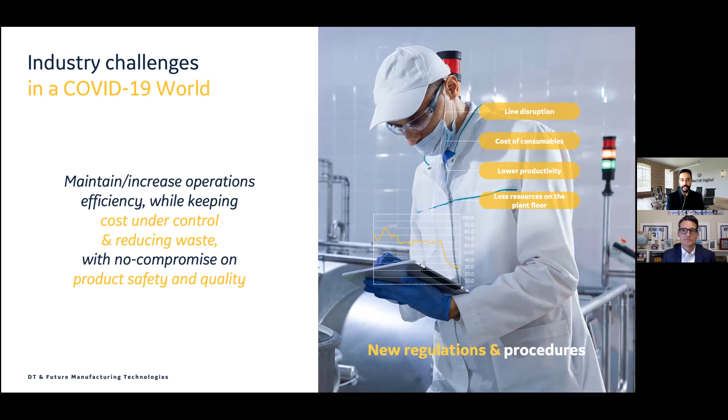To help with things like cost, waste, safety, and quality, a key part of that journey is really leveraging automation software. If you think automation software, that is where data comes from. If you look at something like HMI SCADA, the name itself is supervisory control and data acquisition. It's really critical to get that data to be able to start the digital transformation, to stay competitive and meet the needs of your customers.

What we're really seeing now, with these new needs to do things better and all the challenges of having to be more agile and adaptable, is a blurring of where that data sits. This pathway is changing, where more and more there's a need for what I like to call a data bus or data hub, where all the data from these different systems is accessible in one place with context across them. This is causing a shift in the way you think of these systems, all driving to this central data hub and information used for optimization.

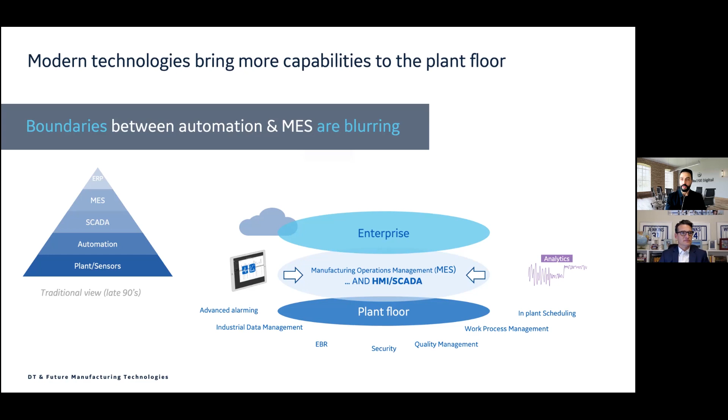Once you have that, data isn't very good unless you can visualize it. Once there's the idea of a data hub, having all the information, it's really critical how you actually get your workers to see and use that information in the most effective way. To try to articulate that, I just want to quickly show this visual here.

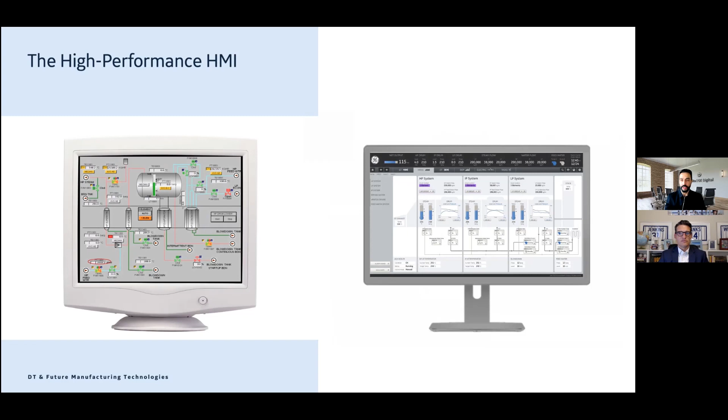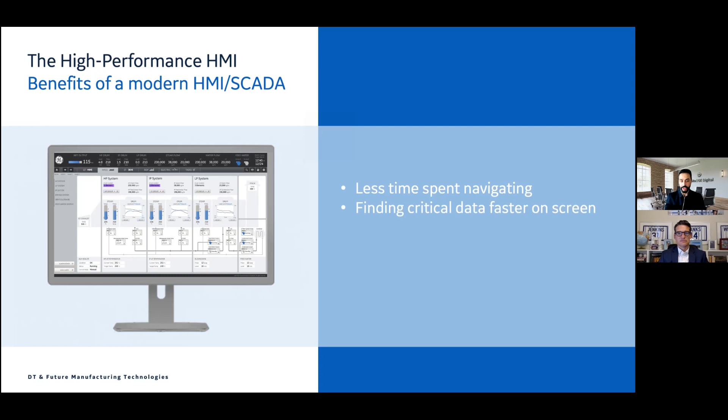So why do that? The key thing here is really about helping users spend less time trying to navigate through the systems to do their jobs most effectively. It's being able to find critical information needed, especially during an abnormal situation, as effectively as possible. With alarms happening, you want to move as quickly as possible from identifying a situation to finding the relevant information to act upon it and fix the situation.

So we've really seen that by having high performance HMIs that make interfaces a lot more accessible and digestible for users, they can be way more efficient.

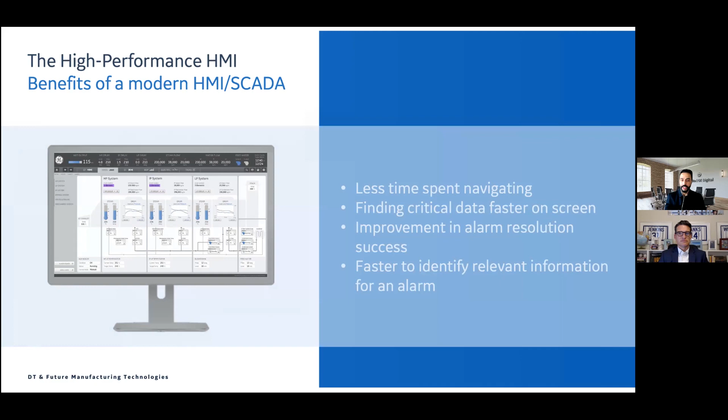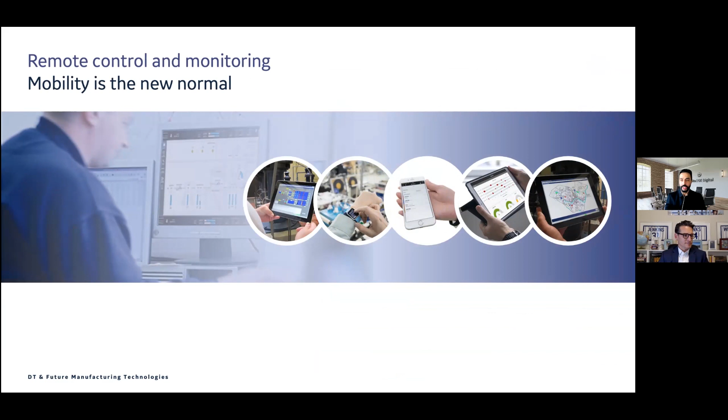And to take that one step further, you go from accessibility and having the right screen to where do you make that screen available to users. Traditionally, it would be like a panel connected to a piece of equipment. But more and more, especially with COVID, it's important now that information is accessible no matter where you are. It's really, really critical.

One piece of that is having information accessible anywhere, anytime, on any device, having that great experience we just discussed, but also making it customizable for that specific user. Depending on role, depending even on accessibility, you want to cater the interface for the task at hand for that specific user. I think that's really a change and a shift.

But the other piece of that, which I mentioned at the beginning, is also being outside of the plant. More and more, we saw with COVID, is the need, for example, even if it's a water treatment plant or a manufacturing plant, to have operators and subject matter experts doing support outside the plant to be most effective.

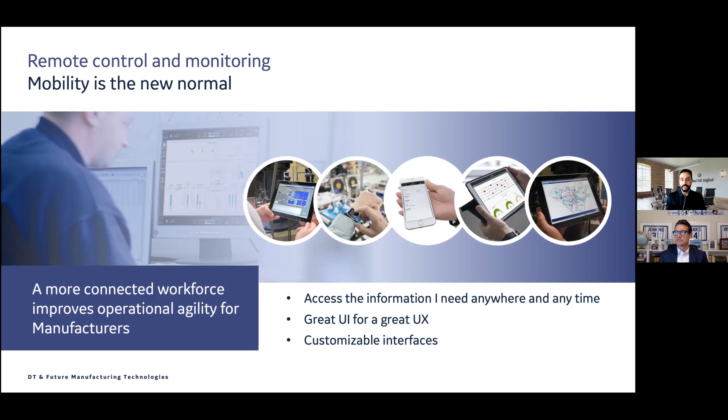And when you look at that in the context of the bigger picture of why, it's about things like: how do you actually use your staff most efficiently? How do you increase that response time to any situation?

It could be an abnormal situation, but also, as I mentioned earlier, it could be supply and demand. Maybe there's a shift in what you want to produce or what you need, like increasing water usage, or because there's a shift in the products that customers want. So you want that response time to be faster to make those changes within your environment.

And lastly, while doing all this and having to be more agile in production, you also want to continue to be compliant to industry and government regulations. We've really partnered with several customers on this journey, especially at the start of COVID, and here are some of the results we've seen.

One thing they mentioned was the speed of troubleshooting - they were able to reduce the time it took by 40%. Again, they were able to react faster. They had better visibility into what was happening at one plant and across the entire enterprise, and were able to be more agile to make adjustments or changes. And lastly, but also as important, they were able to increase safety.

A simple example of that is, I talked to a customer who discussed how they would have a shift change meeting with multiple people, usually all close together huddled in one place. But they started using technologies like phones, and had people further apart while still being able to use their mobile devices to see each other and effectively have those types of meetings.

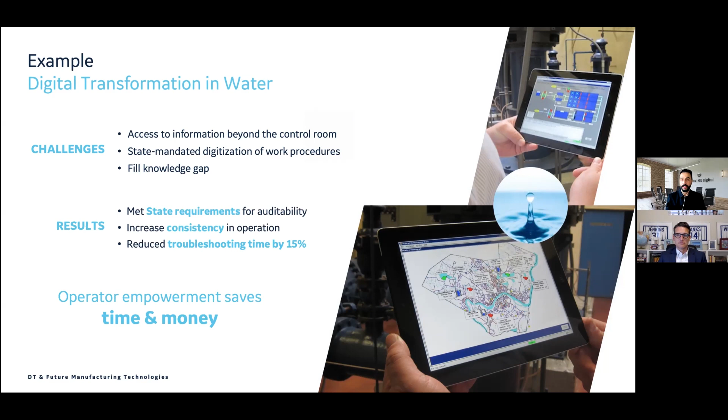So what they really did was use these technologies to create the best interfaces, and standard operating procedures within the software, so they could ensure consistency in operations. They ensured that new or remote users could still troubleshoot, still support people within the plant, and still meet the actual compliance and auditing regulations they need to fulfill.

And in the end, this comes down again to safety, time, and money.

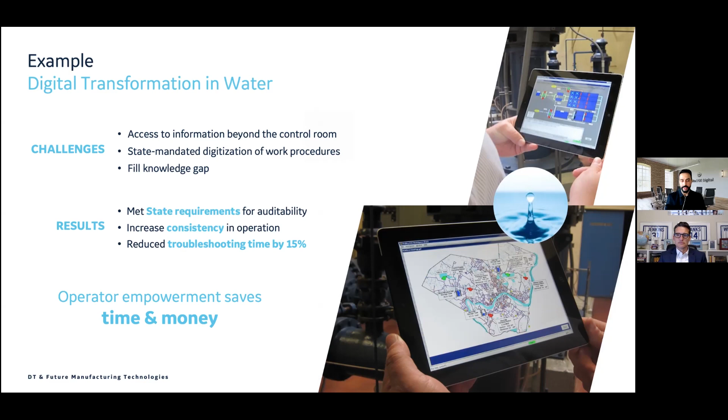So that's the story regarding visualizing data. But what comes after? You have to aggregate data, you want to have context in the data, you want to visualize it. But the next part of that journey is really: how do you optimize through data? And this is really where analytics come into play.

If you look traditionally, when we talk about analytics, the expectation is that there is a data scientist, and a data scientist needs to have domain expertise, mathematical expertise, as well as software development expertise. And that really is hard to find, and that's really challenging.

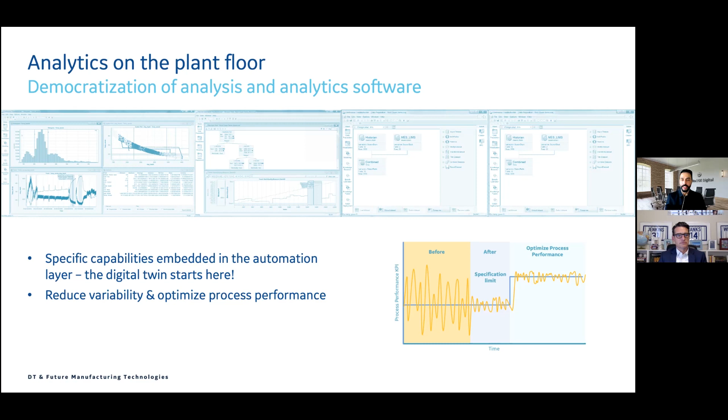So what we're seeing now with new technologies is enabling more of a focus on domain expertise—having control engineers and process engineers who have domain expertise, being able to use software to bridge the gap between the mathematical expertise as well as the software development expertise.

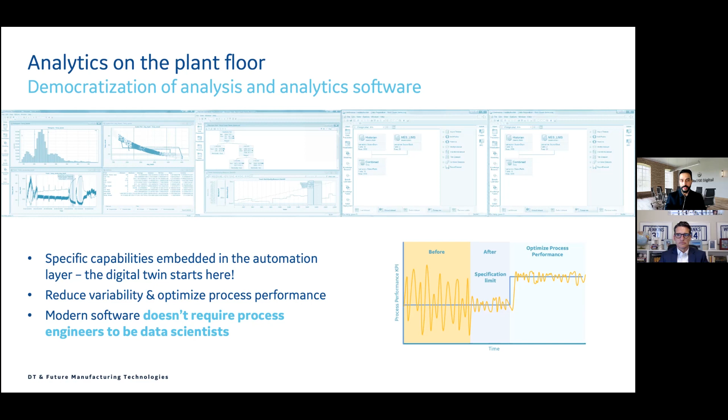A key part of this comes down to automation software. If you can do that, you can start making things better when it comes to the actual monitoring and control of your equipment and processes. As you can see in this picture on the right-hand side, it's all about going from having variation in your process, which can cause quality and performance issues, to making it as optimized and consistent as possible across continued production of whatever you're creating.

So what are some of the benefits of these analytics? Let's go through those. Some of them are things like reduced variability. You want to go from a process with a lot of variability across equipment and process to consistency.

Having speed of troubleshooting, being able to use analytics and visualization to analyze what's going on and resolve it quickly. Having the ability to leverage your staff most efficiently across the entire plant and enterprise, and being able to decrease downtime.

What this really comes down to is, if you think about all the optimizations you're doing with things like a PID loop within a controller, or what you're able to do with SCADA, you can now think about how to actually optimize that to make it most efficient and therefore reduce the amount of time equipment will be down due to failure.

The other piece of this is optimization. If you think of all these things I'm talking about regarding variability and downtime, a way to advance beyond doing things ad hoc for a current situation is to start building out, as I mentioned earlier, a model or a twin of the good case or best case versus what's currently happening, so you can start seeing what the variations are and optimize them.

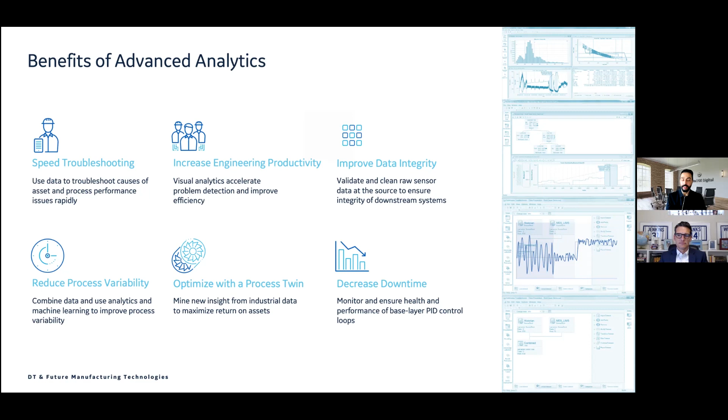Lastly, I want to end with this: when you look at all this, one of the critical pieces is quality of data. If the data you use for analysis is not good, you're not going to get good results. No matter what, you might have the best analytic in the world, but if the data is giving you bad readings and you're using that to make decisions, you will not be successful. So another key piece is ensuring you start this journey by making sure the data you're using for your analytics is actually good quality first.

When you look at all those things and outcomes, in the end it's really about helping industrial organizations get access to the data, as I mentioned at the beginning, be able to combine it and do analysis on it, with the end goal of reducing variability and reducing waste within the organization and within your processes to stay competitive and meet the needs of the customer.

They identified a place for improvement. I think this is critical when it comes to analytics: you don't want to just gather all your data and analyze it hoping to find something. They recognized that their opportunity was actually in the materials, so they focused on optimizing how much material was used. In this case, the material was being weighed, so they wanted to optimize the weight.

What they started doing was combining the data from the raw materials with what was happening within the process and the specifications of the process, along with the end result of the quality of the actual product being delivered.

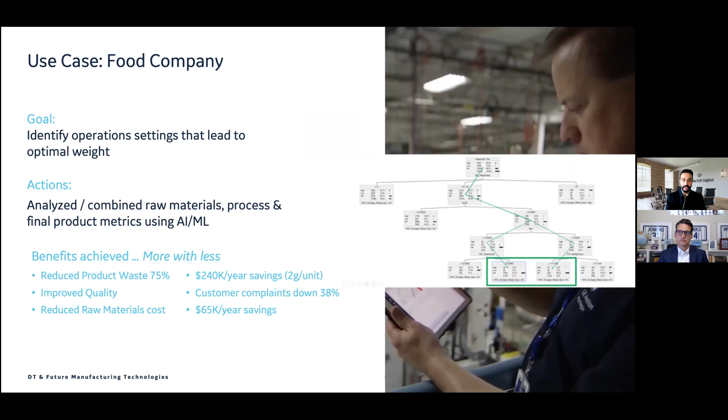By combining those, what they were able to do, which was fantastic, was reduce waste by having the optimal amount of product or material within the product. They were able to increase quality and consistency of the product for the end customer—so, for example, if it was a juice, it would taste consistent. The other key part was they were also able to reduce the raw materials they needed.

I also want to go one step further. There's the analytic piece, but as I mentioned, with COVID and environmental changes we've been seeing over the last couple of years, another key thing is thinking about how to ensure we're doing things in a sustainable way, in a circular way. Circular means having a zero carbon footprint, creating a circular economy and circular production so you have zero waste. Everything I talked about with data aggregation, visualization, and analytics applies as the foundation of a circular economy and sustainability.

There are really three steps to this: measure the use of materials you're using, find ways to use less, and find ways to reuse. In the context of automation software, this means monitoring environmental factors, even temperatures of the plant, the water or steam you're using, looking at CO2 footprints. The other key thing is adding data or metrics around the score or weighting of, say, water on the economy, social and environmental impact. Combining that with measurements, you can start understanding where the opportunities for improvement are.

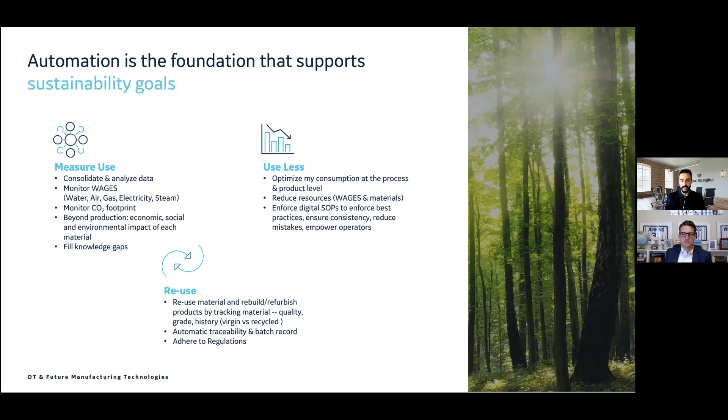As we move from the outcomes we're trying to achieve, another key piece of this journey is the technologies and standards to get there - whether that's analytics, visualization, or sustainability. One key thing that was originally a driver in the software industry but has now come into the industrial space is focusing on standards and having open ecosystems. This allows for interoperability between multiple systems, possibly from different vendors, or something you're trying to integrate with.

This also helps ensure you create the best solutions for users. Some examples are standards for alarming, like the ISA 18.2 standard, or for building screens, going back to high performance with the ISA 101 standard. Again, this helps make users most effective, and it also helps with safety. Then coming back to the data piece I mentioned earlier.

When there are great standards such as REST, OPC UA, and MQTT, they help you aggregate data from both IT and OT systems. REST is generally used in IT systems, so you have a REST interface to talk to an ERP to get data like product specifications, versus OPC or MQTT to get data from OT systems, like a SCADA, PLC, or smart sensor. The idea is you use these connectivity methods to get the data together and give context to it, so you can create optimal screens and do optimizations.